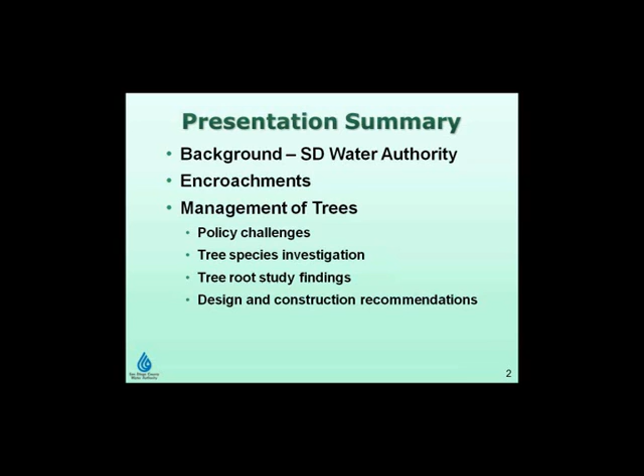As Bill introduced, the topic for today from the San Diego County Water Authority is managing trees in the right-of-way. Again, I'm Bill Rose, Director of Engineering here at the Water Authority, and Vic Bianes is the Engineering Manager. Today we'll give you a little background on the San Diego County Water Authority, some of the encroachments we've dealt with, and specifically about trees, including policy challenges, some tree species we've done investigations on, a tree root study, specifically of our large diameter pipelines, and then some design and construction recommendations we've employed with our facilities.

For those of you not familiar with where San Diego is located, we are in the state of California on the west coast of the United States, actually not all that far from the Mexican border.

Therefore, we import water from other places within California, up towards San Francisco and over towards the Colorado River on the eastern edge of the state of California. San Diego's water travels as much as 500 miles, or 800 kilometers, to serve our customers.

The Water Authority was created in 1944 to import water to our region. We are a wholesale agency. We do not have regular retail customers, but we do have 24 member agencies who then in turn provide retail water service to the 3.1 million people who live in San Diego County.

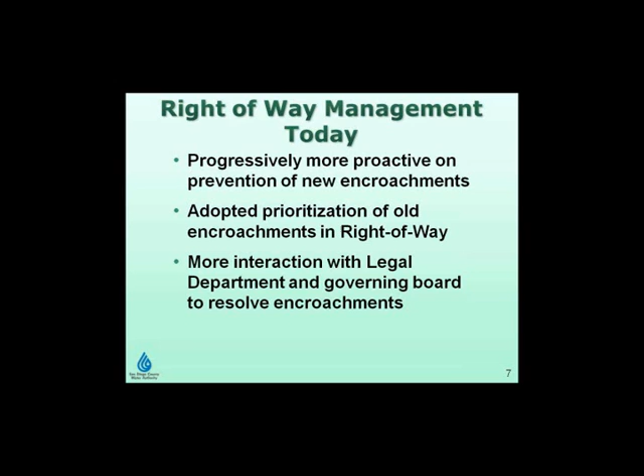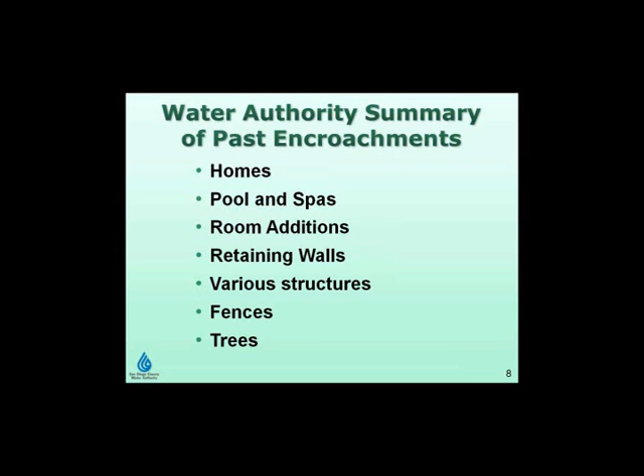Some of those encroachments that we have dealt with include homes being constructed within our right-of-way, swimming pools and spas, room additions to nearby homes, significant retaining walls, a variety of other structures, fences, and our topic today, trees.

Our region has so little water, so when people plant trees, they definitely find a benefit of them. They increase property values. They also have a positive effect on home heating and cooling costs. They improve water quality of our streams and ocean by reducing runoff and erosion.

We're at a transitional zone from a wildlife standpoint. We have a considerable variety of birds and other animals here in our county, and the trees provide shelter and food for them. Also the benefits of absorbing carbon dioxide and producing oxygen. And to be honest with you, trees are just nice looking.

From a policy standpoint, the Water Authority wants to be a good neighbor with its community, and we want to balance the demands of our mission to provide a safe and reliable water supply with those of the adjoining property owners who value trees. So as you can imagine, there's considerable social and political pressure to retain trees.

However, we also need to take a look at the risk and liability to the Water Authority of trees within our right-of-way that may topple and damage adjoining properties. So all of these are factors in us looking at policy-related issues when it comes to the management of trees.

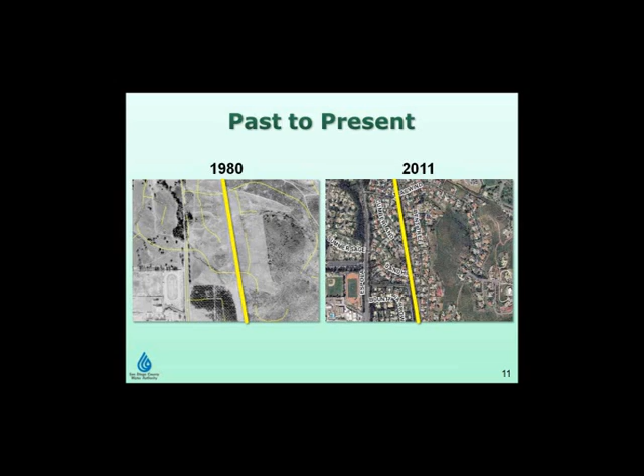Good day, everybody. Vic Bianes here. Trees have always been a concern to the Water Authority, specifically trees in our right-of-way corridor, whether it's how we deal with trees on the operation and maintenance perspective, or during an emergency, how best to remove trees to get to our facilities. In addition, we've always wondered the impact tree roots have on our adjacent facilities.

I know a lot of work has been done on the sewer side, the gravity system. As a matter of fact, IKT did some extensive work on the forces of tree roots having on utilities. But not a lot of work was done associated with tree roots and large transmission mains. So we embarked on doing our own study.

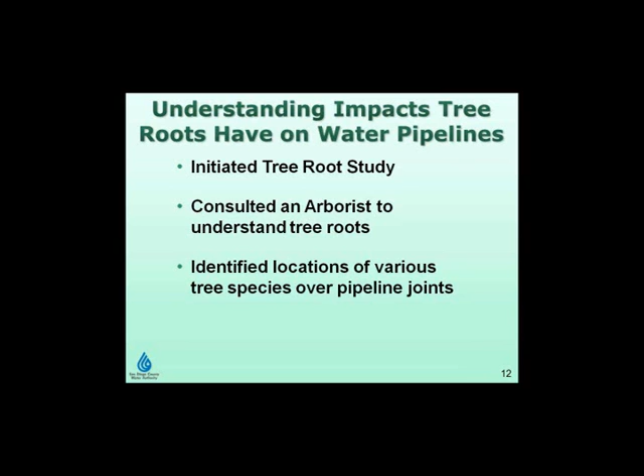We hired an arborist who is an expert with trees. The arborist helped us develop a strategy and planning guideline for us to work from. The arborist shared with us that they expected to see the tree roots somewhere between 3 and 5 feet, and recommended that we look at trees in low topographic areas where potentially water was more abundant, and therefore a good opportunity to study the trees.

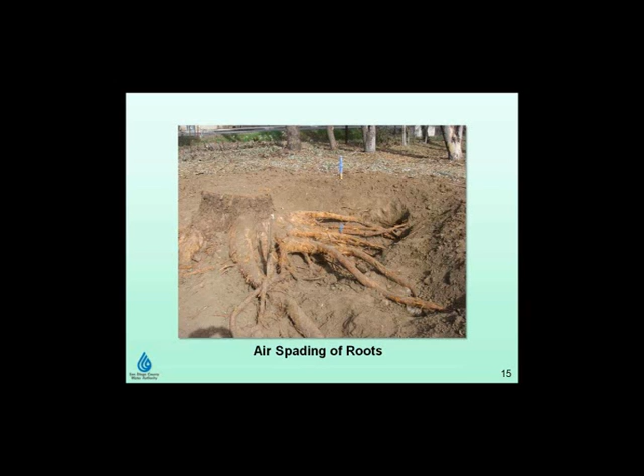Here is that same 125-foot tree cut down to the base trunk. We then used air spading to basically take off the topsoil to get a better understanding of the density of the root system and where the roots were traversing. In the center of the photo, you can see blue stakes, which is actually the center line of our pipeline. This gave us a very good idea of what the roots were doing, at least at the surface area.

We also used conventional methods, and many of you are very familiar with this. We have a track hoe here where we're excavating around the pipe. This actually was not a very good method because it ended up taking the root system with it. This is a very good example of seeing the roots in the center and not being able to follow what happens as it works its way down our pipeline.

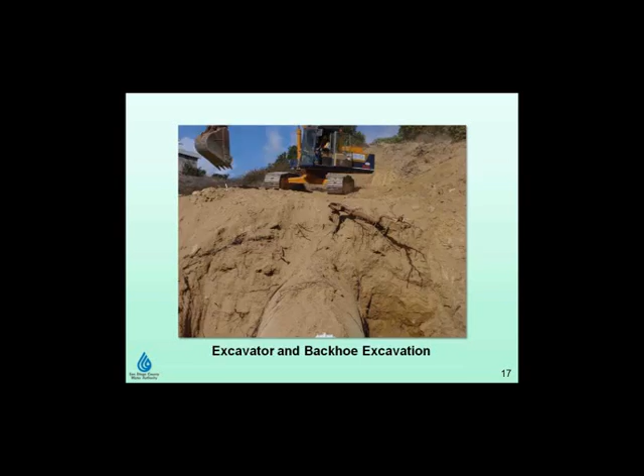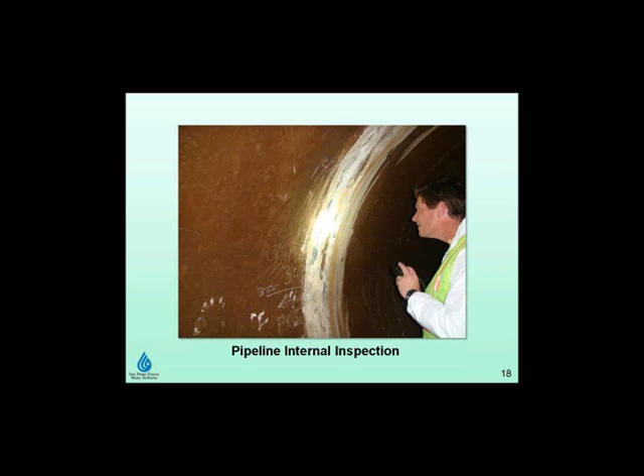All of our pipelines are inspected internally every 3 to 5 years by our O&M staff. The pipes are shut down and drained, allowing us to get into them to inspect the coatings and look specifically at the joint areas. This is a joint area on a 72-inch diameter pipeline, 183 centimeters diameter. In the inspection, we're detecting any issues with our pipeline, and to date, we have never found a tree root that has penetrated through our joint and into our system.

Not only did we look at eucalyptus trees, but we also looked at trees that predominantly fall within our right-of-way. We looked at pine trees that have a deeper root system, and we also looked at the laurel sumac bush, a native plant that grows in our environmentally sensitive areas. We also looked at the pepper tree and citrus trees. In all, we cut down approximately 200 trees to investigate what impact the root system would have on our pipelines.

So what were our findings when we completed this study? The study actually cost us about $25,000, and what we determined is our pipelines have a minimum depth of 5 to 7 feet. The disturbed soil in our pipe trench did act similar to what's referred to as a French drain - no affiliation to the country of France, it was actually Henry French who developed this system. It's a perforated pipe surrounded by gravel, which allows us to drain the surface and subsurface area of water. So our trench actually acted like a French drain.

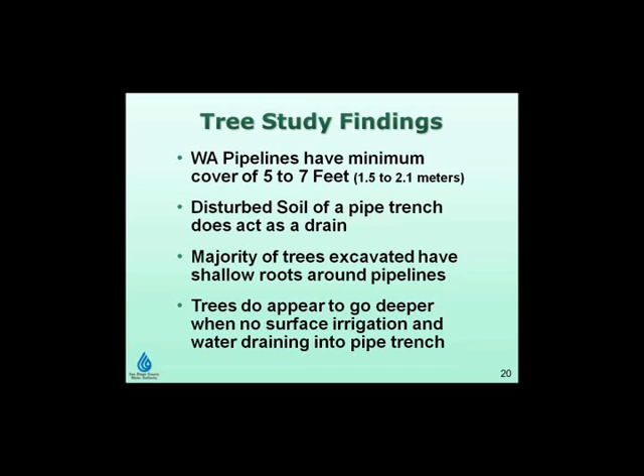The majority of our trees excavated had very shallow roots around the pipeline, but where there was no irrigation lines, the roots went much deeper. What we also found is any of our pipelines under pressure, we did not see any tree roots penetrating into the joints. So we did not see any leakage or damage as a result of the roots.

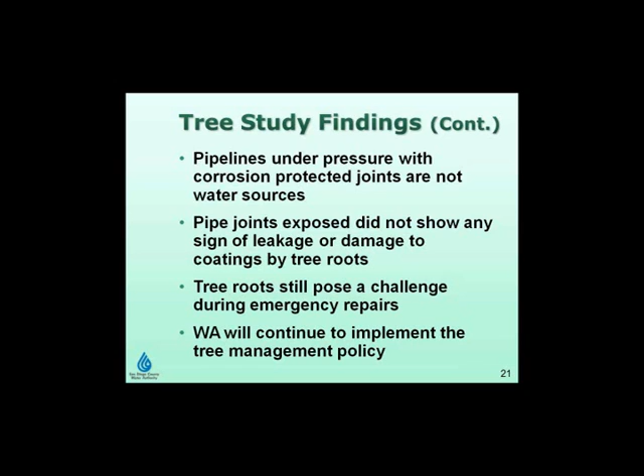Our tree roots still pose a challenge during emergency repairs. As I mentioned earlier, the 125-foot tree, we needed to cut it down to get access to the base, and that took us about a day and a half. We tried to restore services to our customers within 10 days to ensure we could still provide water to the communities we serve. We will continue to look at implementing the tree management policy, which Bill will now get into a little bit further.

Thank you, Vic. So as we moved forward with this process and implementing, the first thing we needed to do was to do an inventory of our pipelines and determine their condition. This is an important factor since some of these pipelines are well in excess of 60 years old. That condition, then looking at how the trees would interact with the pipelines, created a rank and prioritization of which trees would need to be removed. Then we implemented a policy to go and remove those trees and budget money accordingly.

Some of our design and construction practices, which will further reduce the potential impact of tree roots on our facilities - we install slurry plugs, a weak concrete slurry mix at expansion joints to reduce the migration of water in the pipeline zone. We also install filter fabric in the pipe zone to stop the migration of fine soil particles into the gravel backfill of our pipelines. This removes a source of nutrients for the tree roots, and we hope that they then don't follow in and around our pipelines.

We do install those subsoil drains, those French drains, to daylight at low points near where we drain our pipelines at blow-offs and pump wells to remove excess water from the pipe zone. And lastly, we do occasionally backfill our pipelines with that same slurry cement mix to further prevent root intrusion into the pipeline zone.

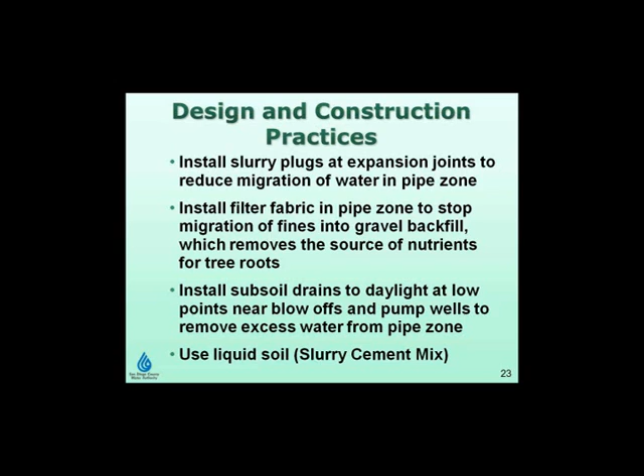So with that, that concludes our presentation, and we would be happy to answer any questions from the participants.

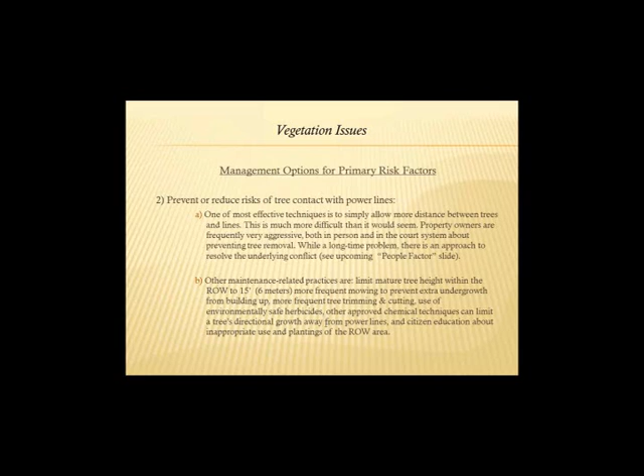The second and most commonly used option is just to prevent the risk of contact between trees and power lines. That sounds very basic, very common sense, but it's very difficult to achieve. One of the most effective techniques is to simply allow more distance between the trees and the lines, and again, that is more difficult than it would seem.

Property owners are very frequently aggressive, both in person and in the legal systems, about preventing tree removal and trimming. This is a long-standing challenge for power companies, but there is an approach that may help resolve that, and I'll address that in a slide later on.

Another maintenance-related practice: for our company, we allow people to plant trees in the strips where the utilities are, as long as we have access and the tree's mature height is less than 15 feet, which keeps them from growing up near the power lines. A lot of people don't realize that electricity does arc - trees don't have to actually touch the lines, they don't have to get within a contact situation. The electricity will arc over to a tree if it gets close enough, and it will arc over to a person if they get close enough, kind of like static electricity when you touch a doorknob. Same concept.

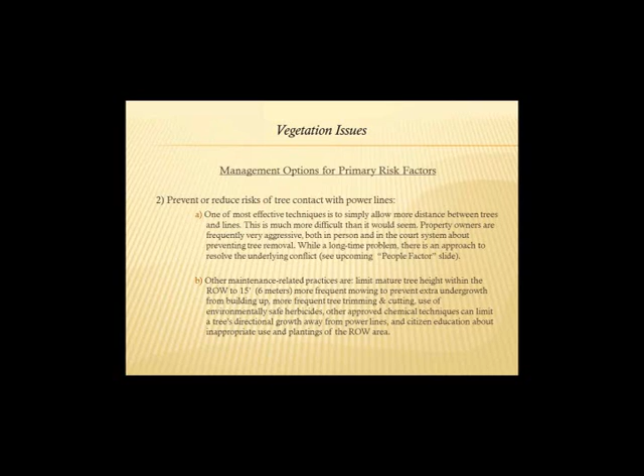Lastly, citizen education about the proper and improper use of plantings within the right-of-way is a topic that holds great potential for improvement.

The upkeep of right-of-way can be done in a lot of different ways and to different standards. This photo on the left shows a power line going through a golf course area, where the company planted some extra landscaping and grass, but the landowner actually maintains all of it.

This is much more than Duke could ever do. With 250,000 miles of right-of-way, we could never maintain this kind of situation.

More likely through rural areas, shown on the right, is a much more environmentally desirable method. It doesn't look as pretty, but we cut material and push it over the side and let it biodegrade, which is a friendlier approach from an environmental standpoint.

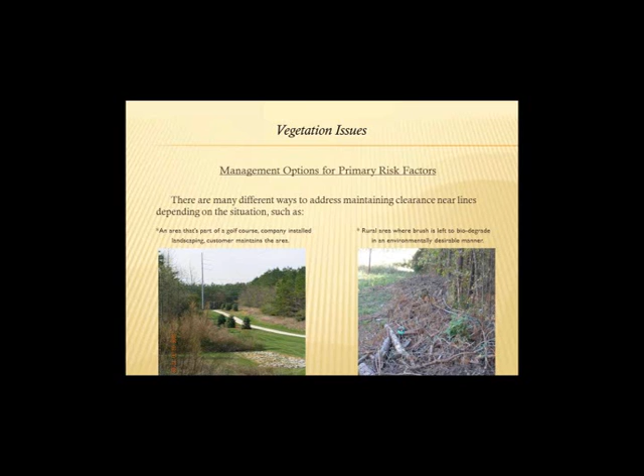What I call the people factor is the source of a large percentage of vegetation management problems for us, because there are groups and individuals strictly opposed to any tree cutting. Most people, though, are amenable or agreeable to talking about these things.

I will say that citizens are frequently presumed to be adversaries. When tree trimming crews go out, sometimes they feel like everybody is automatically going to be against them, and that's not necessarily the case. It does sometimes happen, but it's not always the case.

Politicians are sometimes used by advocacy groups and others to achieve their goals, which is to stop the cutting of trees or the building of power lines for people who believe we shouldn't have any more. These politicized projects result in increased cost, bad publicity, delayed schedules, or canceled projects. It's different in every situation, but these issues are almost always involved when you have legal actions and advocacy groups that stand up to stop a project.

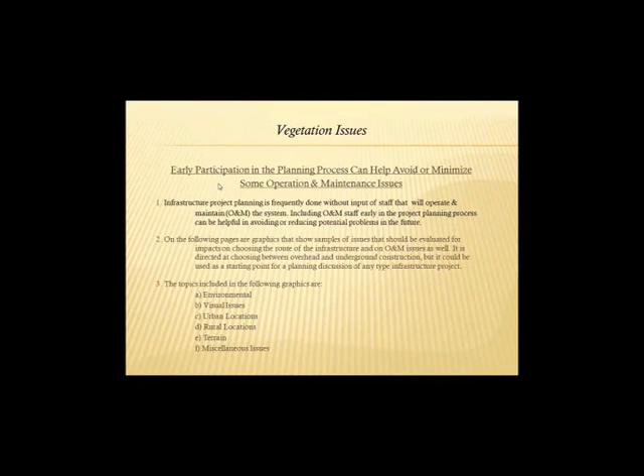Early participation is the last section. If people who do the operation and maintenance of infrastructure projects get involved early enough in the planning process, they can help avoid or minimize some of these operation and maintenance issues related to vegetation.

Infrastructure planning is frequently done in some companies without input from staff who will actually be operating and taking care of vegetation issues later on. If they're able to get into the process early enough, they can help avoid or reduce potential problems in the future.

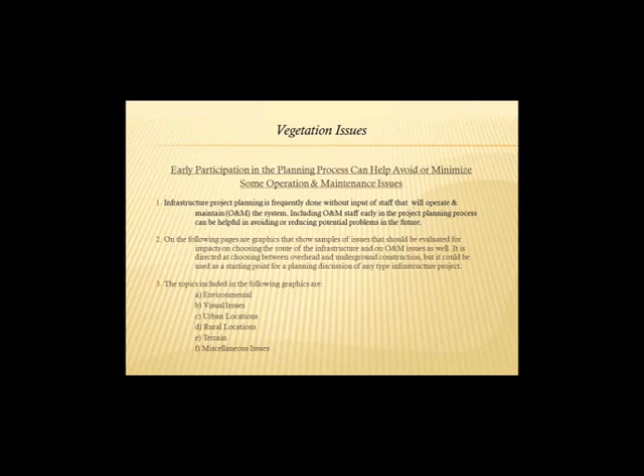On the following pages, I've put together several charts or graphics showing samples of issues that could be evaluated. We won't go through all the different items, since each project involves different challenges, but these are examples of the kinds of issues that need to be looked at. I'll go through these very quickly.

Project designs are greatly affected by wetlands. In my part of the world we have wetlands, mountains, and coastal plains, so a wide variety of terrains, but wetlands are a big challenge. They obviously affect vegetation management issues forever, since once the project's put in, that's going to have a big impact.

What we call brownfields are environmentally contaminated land, old industrial sites. Obviously that affects vegetation issues for as long as you're there, until cleanup and that sort of thing is done.

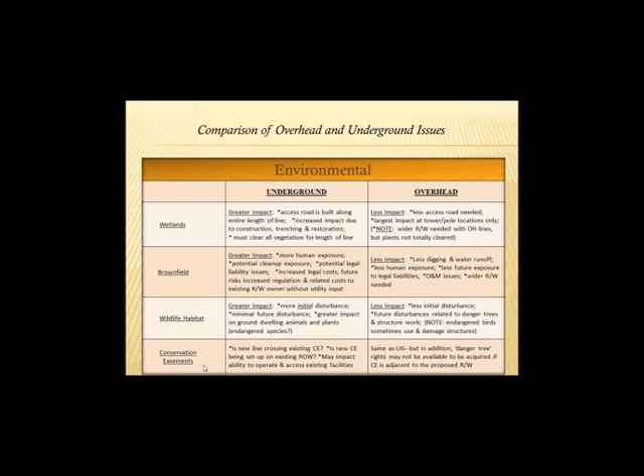Wildlife habitat is another issue that's affected. Conservation easements are tracts of land legally restricted from development, and they're obviously a challenge in some cases. You also see the difference between public lands and private lands as far as what you can and can't do regarding plantings and trimmings.

Historical sites, archaeological issues—obviously if you're going to be digging, if you're going to be spanning, the visual impact is certainly greater with historical areas.

Urban locations, you look at smaller footprints, you look at plantings that are allowed in the city and outside for rural areas.

In congested areas and urban locations, you have congestion with other utilities that I'm sure everybody on this call is familiar with, but that's one of the considerations that maybe the planners wouldn't necessarily give much weight to. But if you operate the system, it would obviously be a challenge for you from that point on.

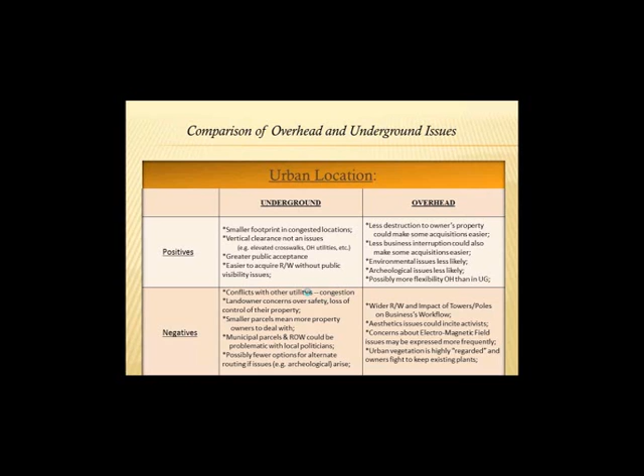There's also different challenges in rural areas—you have challenges for terrain. These issues are obviously going to have a big impact.

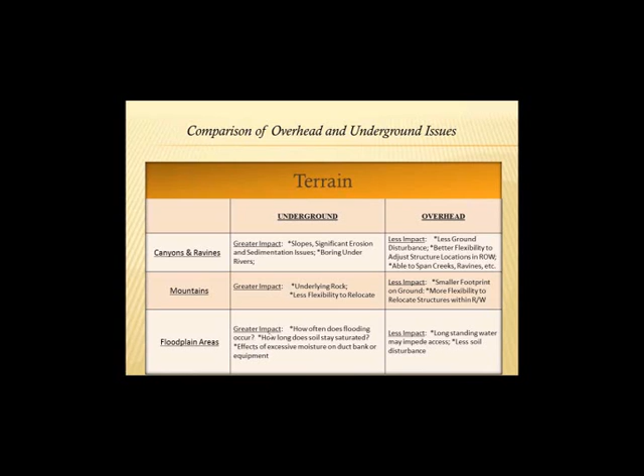Again, there's more challenges, particularly future land development. If you're going to be providing infrastructure, you need to know where your development is. You need to plan for it. You need to not be relocating your utilities because somebody didn't think about what it's going to take to operate and maintain the system.

Final slide is just some things to think about: ask if your department participates in the planning process, and would it be helpful to identify problems before budgets and schedules are established. These things are a big issue in my company, where sometimes teams of people get together and maybe the people who are going to operate the system didn't get invited or didn't get there early enough in the process.

So that's the end of my presentation. Are there any questions? I've put my name, my email, my phone number up if anybody would like to consult and ask questions in the future. Be glad to do that.

Okay, thank you very much. But I still have one question for Glenn. And Glenn, you have shown us a

comparison between underground power cables and overhead power cables. In Germany, there's a lot of discussion about electromagnetic waves and that they are a danger to people in residential areas, and that for this reason one should try to build all those new cables we need now underground. Is that an issue in the U.S.?

Nice to see you, nice to hear you. I'm not very technical, but I'd like to show you something about law and planning. In the past, I was in charge of planning grids for electricity, IT, and gas, and now I've changed the business a bit, still dealing with cables and pipes.

Coming to the first slide, just to show you where we are in Germany. Thanks to NASA, where I've taken this photo from, you see the world at night, energy hotspots. The yellow arrow shows where we are, in the middle of Germany, more or less in the middle of Europe, and you see a lot of illuminated countries.

What you can see, which is also very important for planning grids, is that we partly have an east-west direction, but very often we have a north-south direction for the hotspots. If you're dealing with shifting energy, many people say let's shift it from east to west, but unfortunately we have to shift it from north to south.

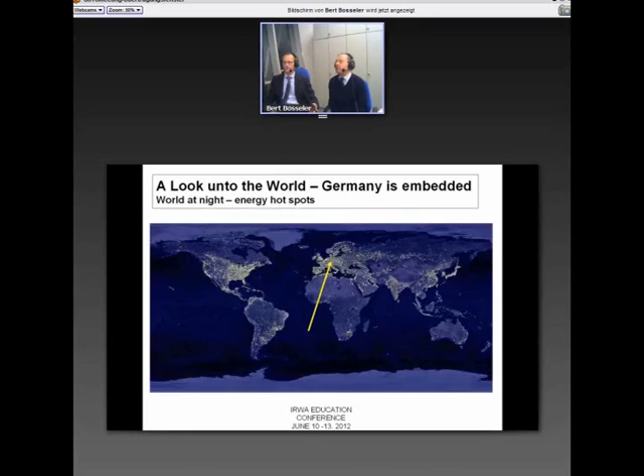So if we want to take solar power, for example, by the rotation of the Earth, it doesn't help very often. You can also see where energy is needed.

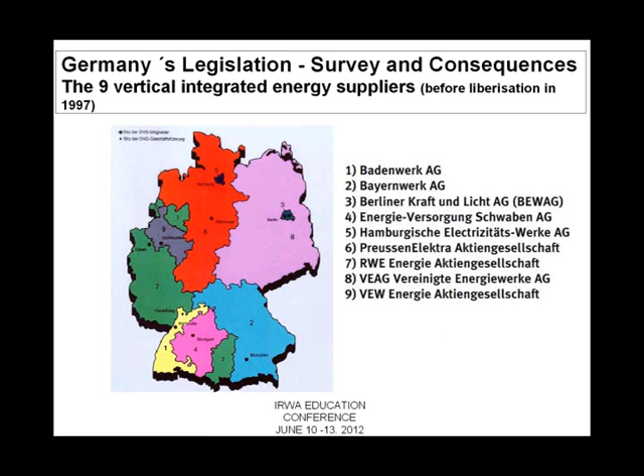So that was the situation before liberalisation, and then we changed to liberalisation. What happened? Now there are only 4 grid operators left.

So everybody thought about saving energy, and what did they do? They reduced the number of power stations. Many power stations were switched off, and last year they said even the nuclear power stations will be switched off within the next 10 years.

The second step, as you can see, was the reduction of grid owners. They also wanted to save money, saying we'll optimize our grids. Optimization very often means reducing what we don't need, and sometimes they build some bigger cables to prevent blackouts, but that's a point where we're stopping at the moment.

So what had to be built, or what happened to the grids? The commercial view says you can't earn money with the grids, so the grids were sold, and now they are almost not in German hands. For me, the grid is the backbone of the industry. They were sold to foreign companies looking at world markets, asking where they could get very high interest rates, and the interest rates for grids are much higher at the moment than for money in a bank.

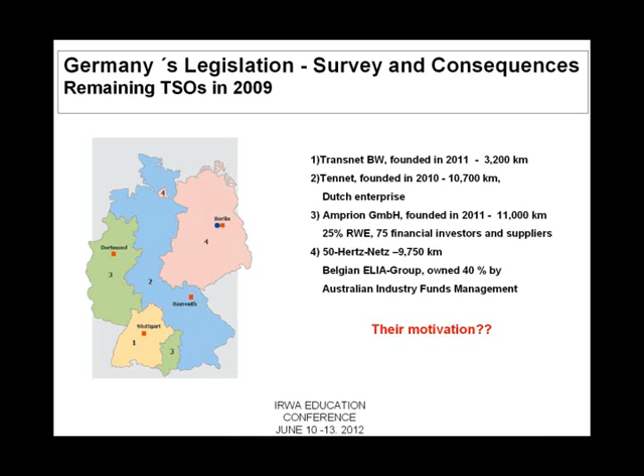The former E.ON grid is sold to a Dutch enterprise. Amprion, in the past owned 100% by RWE, now just 25% RWE, is a company which also tries to keep the frequency constant. And there's another grid sold to Belgian and Australian funds. They don't have the biggest interest to invest money, and if they want to invest, they have some other problems.

So what we have to do when we want to switch off the power stations, we need new grids. In the past, we had the production of electricity where the power is needed. Let's compare it to a human body: the head is quite close to the heart, and you have very good vessels in between for the main supply. That was the past in Germany.

What they are doing now is building offshore parks in the North Sea. So they are putting the heart into your feet, into little tubes, and the heart in the little tube has to supply your head. I don't know whether it can work, but there are a lot of dangers that it fails.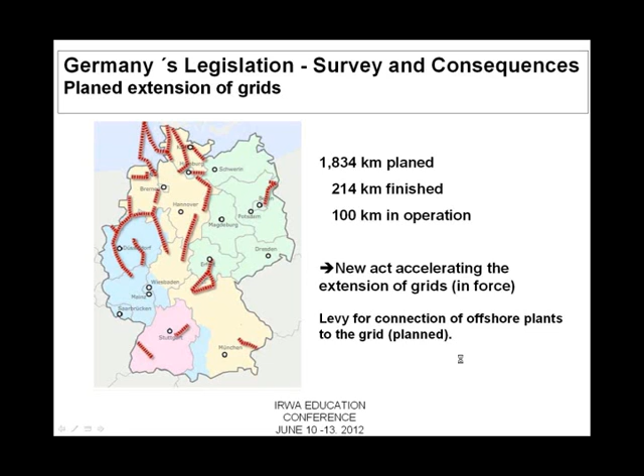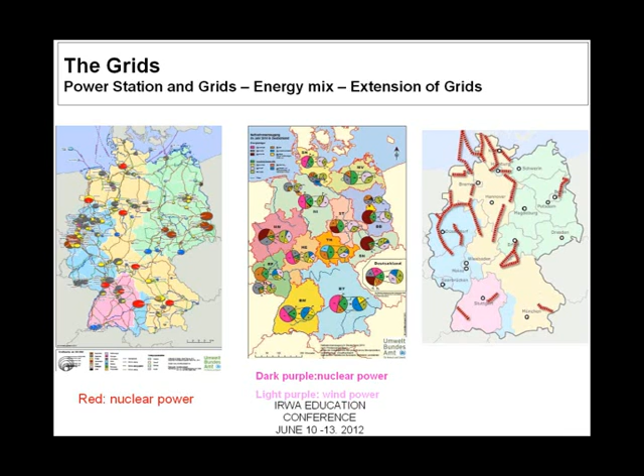How does the grid work? At the moment I'm in charge, I was in charge for the distribution. You see the medium voltage and the low voltage. The high voltage, at the top of the slide, has to be built.

Electricity has, compared to gas, one very good thing: you can transform it to high voltage and low voltage. But everybody forgets that electricity is an artificial kind of energy. We have to keep the frequency constant, and we have to keep the voltage constant.

When you have quite a lot of renewables in your grid, and you don't run the big power stations, the frequency can move up. What can happen is the renewable power stations, like wind turbines or photovoltaics, are switched off. That's not the problem. But what happens if you've switched off the big power stations like coal or lignite power stations? The frequency decreases, and then the grid is switched off.

So what we are coming close to is blackouts, because we can't keep the frequency. That's the situation we have in Germany, and we are still waiting for the top part, the grid for transportation, the high and highest voltage, to be increased and built. At the moment we are more or less a bit disconnected.

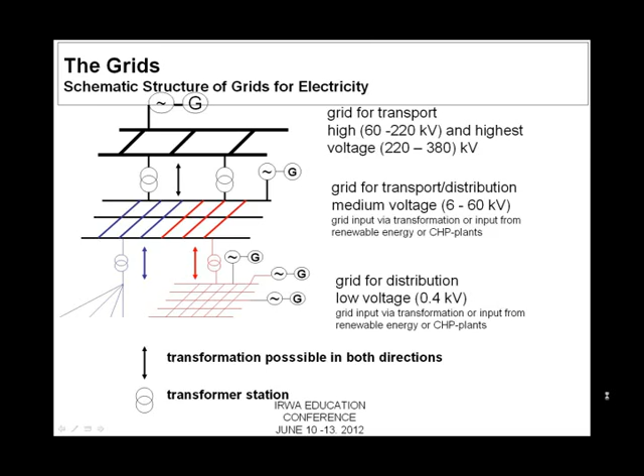So I think for me it's a very dangerous thing, because the backbone, the grid, is missing. We would be happy to be able to build grids and talk about routes which can have interference with the grids. You can see as long lines what I tried to explain, for 2022 and for 2032. We have to build grids through Germany.

Unfortunately, the same is happening here. It was planned to build them as overhead cables, but unfortunately the discussion in Germany is very hard, and they don't like the magnetic fields. Everybody wants to have the cables in the ground.

The estimation was 57 billion euros with overhead transmission. At the moment it has increased to more than 80, I think, because everything has to be put into the ground. And what we don't have is the space — we don't have the space for putting the cables into the ground, because we have a very high population density, 85 million people in Germany.

And it has an advantage to have the grid in the ground. Think about floodings - the masts can't be washed away. We have, because of global warming, very heavy local storms. We have trees on the cables, and we have quite a lot of interference with them.

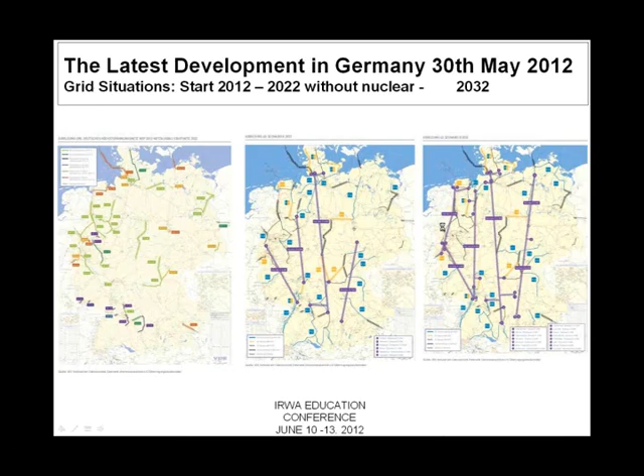And in between, us a slide of how it was done in the past with the ditches, where money remains. It's very expensive to put cables or pipes into the ground. And there is also a newer slide, because we changed our standard.

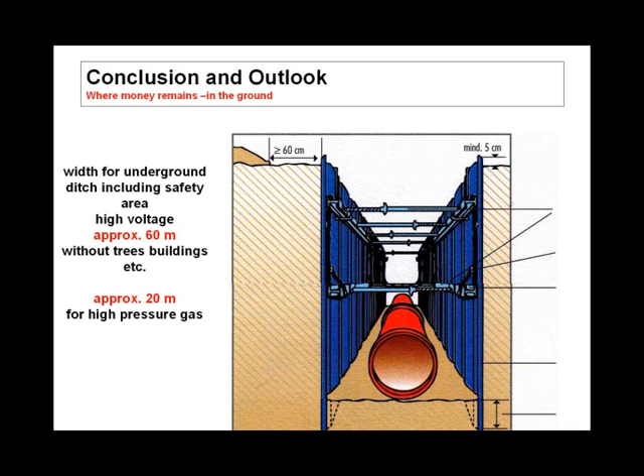So we would be quite happy to build the high voltage grids. At the moment, it seems to be stopped. But with the new minister, they call him Super Minister, Gabriel, well, he's starting today. We'll see and wait what will happen to our grids and also to our electrical supply, because I think everybody needs electricity. And if you think about a blackout - I don't like to think about it because it's my task - no food, no light, no money, nothing works without electricity. So we have to make sure that our grids are working and that we have good grids.

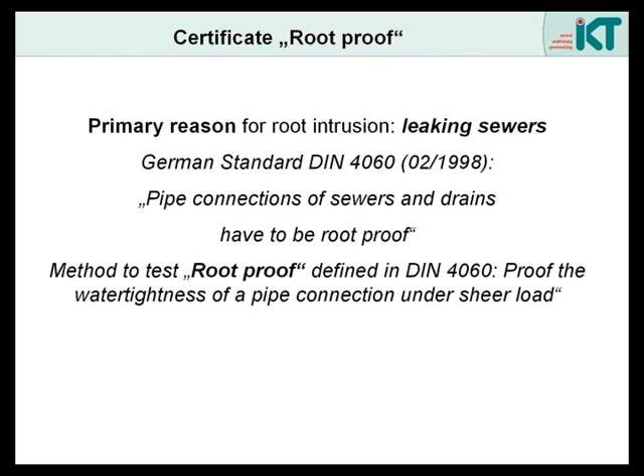As you know, we started with a very small problem in Germany. It was simply that we have some roots in the sewer systems, and we have to find solutions for that. Therefore, we started a project in 1998. In the same year, we had a German standard, DIN 4060, which described what are root-proof pipe connections. It states that pipe connections of sewers and drains have to be root-proof, and the method to test root-proofness defined in DIN 4060 is to prove the watertightness of a pipe connection under shear load. But we very fast found out that this was a logical argumentation for engineers, but trees don't read German standards.

So I will now show you some pictures of roots and what they are doing in the ground in the city - not actually the big transmission pipelines, but I have some pictures of what roots can do to oil pipelines, for example. We started with a small problem. We started to look at the bedding material where the roots grow very vividly, and Bert pointed out that the pore volume is the reason why they grow there, and that we have no problems with water, with the lack of water in the ground.

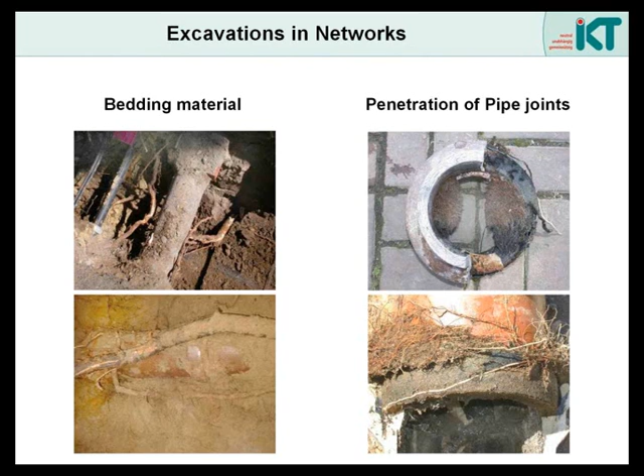And therefore they find trenches, and therefore they find the pipes and the pipe connections. So we have several cases of root intrusion in pipe connections. It's one of the biggest problems in sewer systems. This is a detail of one of these pipe connections with an elastomeric ring, and you see that this

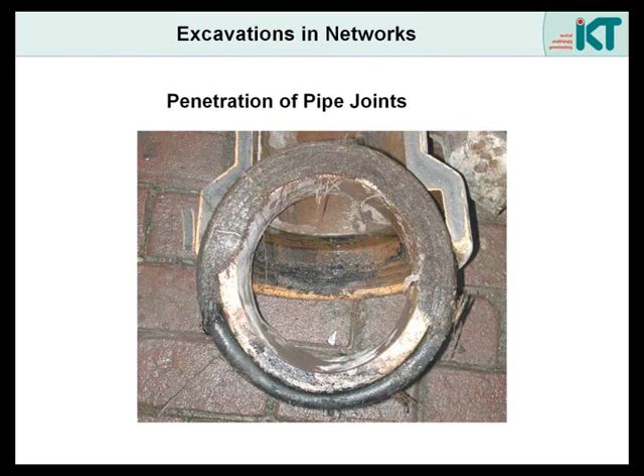is a modern pipe connection, and roots are able to enter the sewer pipes through these connections. We asked, can they really do that? And we found it, for example, at a depth of 7 meters. So we have not only shallow roots.

We found out that the trenches of the private sewers we see here, these orange sewers, guide the roots into the deep. The private sewer, which is responsible for the sewage that comes from the private house to the main sewer, is the one responsible for the aerification of this zone.

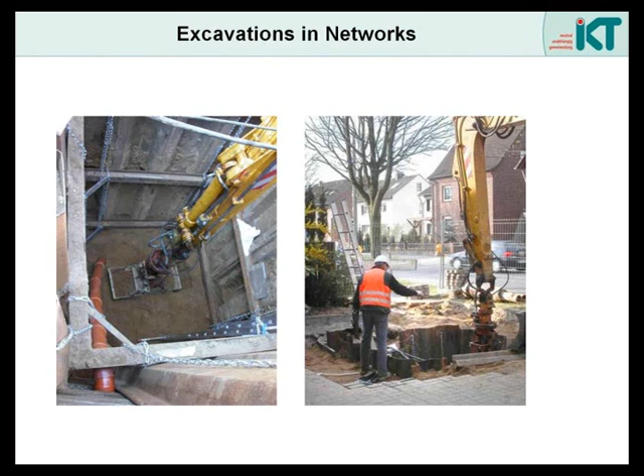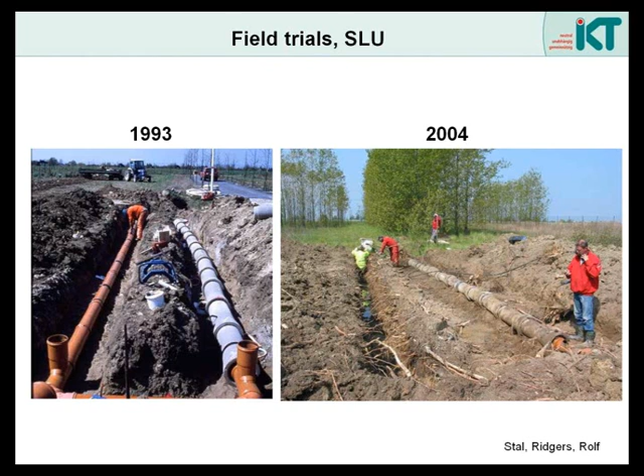Going international, we have some partners, for example in Sweden, who built some trials in 1993 and dug them out in 2004, and they found that especially other materials like PVC and concrete pipes also have an impact from root intrusion, though PVC especially doesn't seem to have the problem.

For example, the Australian CSIRO made some tests with PVC pipes and found that after 32 months of testing, no PVC pipes were penetrated by tree roots, but the other vitrified clay pipes and FRC, fiber reinforced concrete pipes, had penetrations after 32 months.

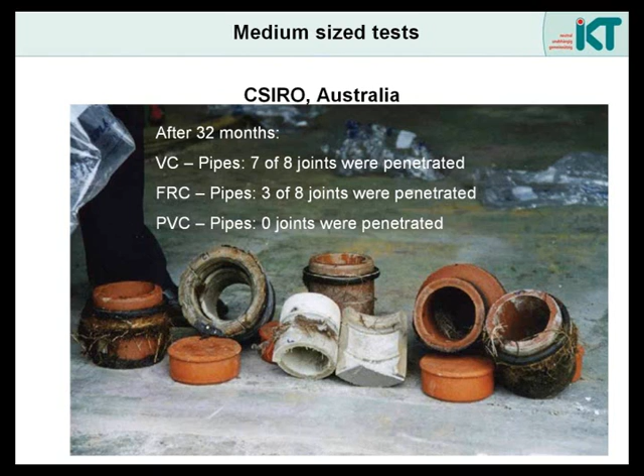So we are convinced that most of the pipe connections for sewer systems have a problem when they consist of a spigot end and a gasket. Therefore, we made these tests to measure the root pressure.

We had a kind of small testing facility at IKT where we used plaster plates, put in, for example, oak trees, and let these roots grow underneath the plaster plates, with pressure-sensitive layers put out underneath, and then we measured the contact pressure between the plaster plate and our pressure-sensitive film.

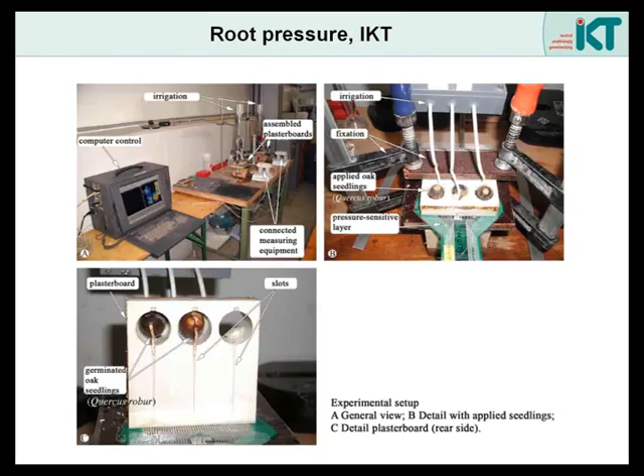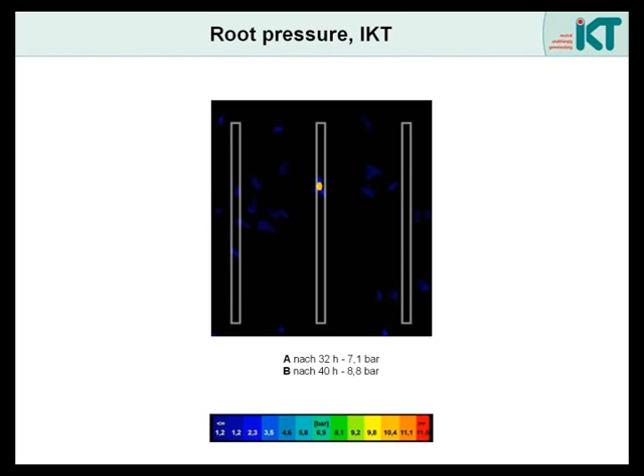These are the slides that show the roots growing in this area. They have secondary growth, meaning they get bigger, and after approximately 70 hours we have a contact pressure of 11.9 bars, that means 1.19 megapascal.

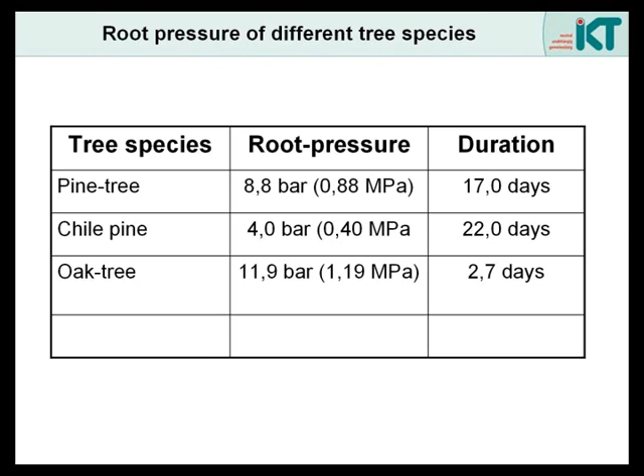We did that for different tree species, for example the pine tree, the Chile pine - in German it's Araucaria - and the oak tree, and measured different root pressures after different durations, coming from the Chile pine at 4 bars up to the oak tree at 11.9 bars. We don't know why there are these differences, but we measured it.

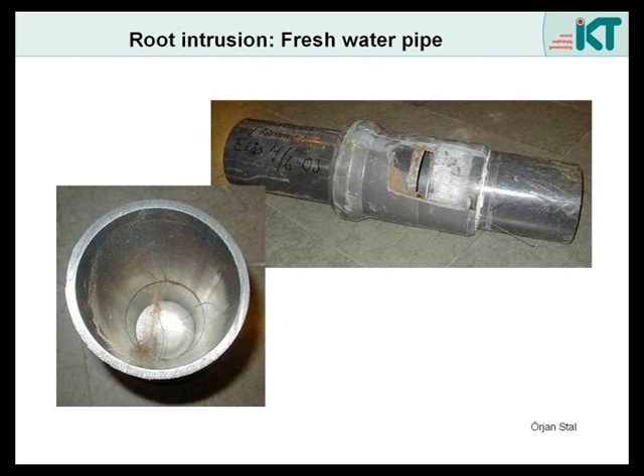during installation. Possibly small roots lived up these glued pipes, found a crack, and grew in. You see here, for example, fine root materials that grow in the annular gap between the spigot and the gasket.

Another possibly bigger problem is the contact to gas pipes. This is a picture from Johann Wittmann from the city of Mönchengladbach, and these contacts to other utilities can cause different damages. In the easiest case, some gas comes out of these pipes, and the network operators can smell it, like in this case, and build a new pipe.

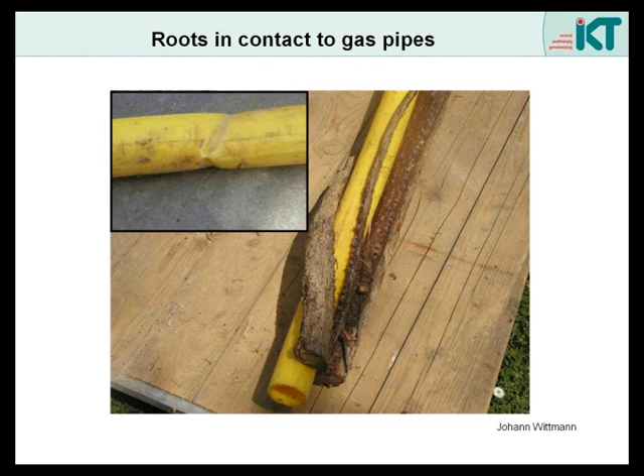But it can also go into private houses and cause an explosion, as it did in the city of Viersen, for example.

Then we have other problems with roots. Roots follow the trenches and the surfaces of pipes, and when you have coatings, for example with this bitumen material, some of these roots like the bitumen and get in contact with it. They have some acid that comes out of the root tips, and this can destroy the coating, and afterwards we have the problem of corrosion in these pipes. This is, for example, a high pressure pipe.

These are pictures from Clemens Heidger of the city of Hanover, showing cases where we have a concentrated load of oak root on steel pipes. This interaction can cause several damages to these pipes when wind load goes into the root and then down to the pipe, and possibly can crack these pipes.

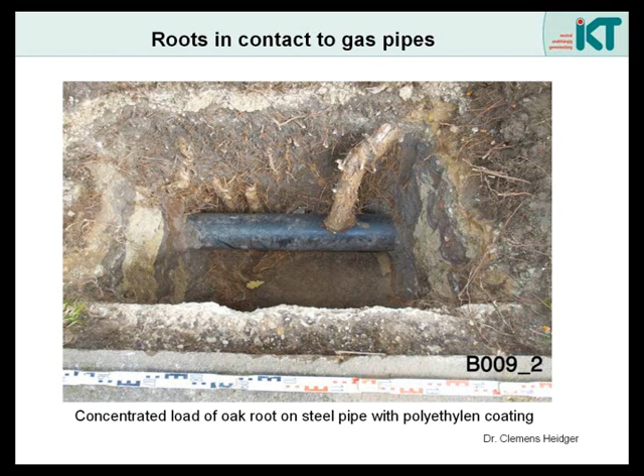In this case, either the root has to be pruned, or the pipe has to be laid in another position.

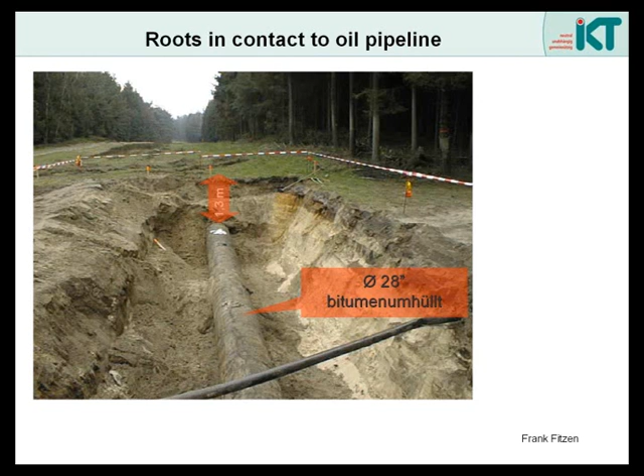And I have a picture from some oil pipelines, from one company that runs an oil pipeline from the city of Rotterdam to the Ruhr area. I got these pictures last year, and you see here the oil pipeline and the corridor that's normally protecting these pipes. But when you look in detail, the roots from these trees grow the way from the point where they are planted to this pipeline and get in contact with it.

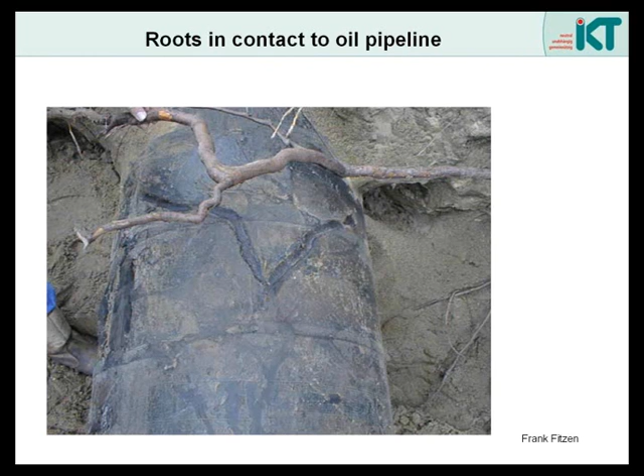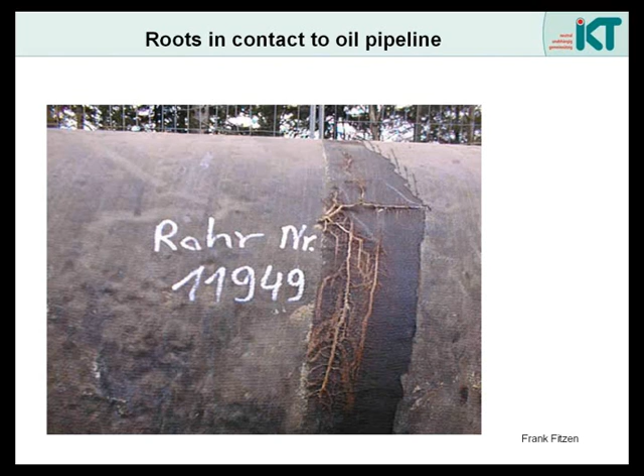This oil pipeline, like the gas pipe we saw pictures of before, has bitumen around the steel pipe, and the coating in this case was intruded by roots. Again, corrosion could be a problem, and when this corrosion is too big, it can cause a big problem when the pipe is leaking and oil is coming out.

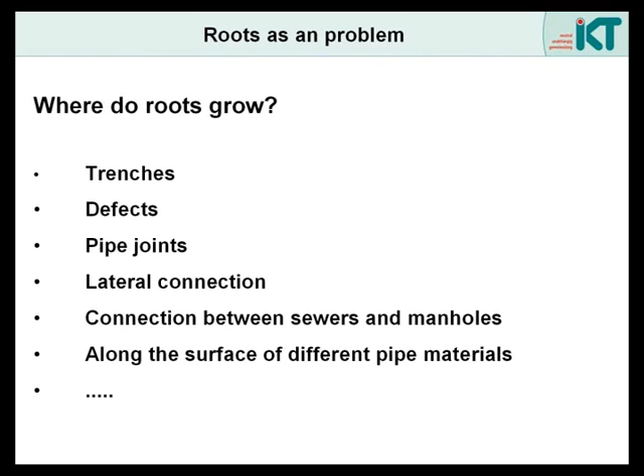So normally, as an engineer, we have to say roots are a problem, because they are growing everywhere - in trenches, defects, pipe joints, lateral connections, and the surface of different pipe materials. Normally we have to say: no trees in the city. That could be one solution to the problem.

But as Bill Rose pointed out, trees are not only causing problems, they have some benefits. For example, when we talk about shadow, we are talking about oxygen, and we can create a win-win situation, as it is described, for example, there.

Therefore I will show you this small example, an old example that we often discussed in our working group. It shows the problem in cities when you have to find new corridors for utilities. Normally you use a pedestrian way for this case, and on the left side you go along the pedestrian way and put in, for example, a gas pipe or a water pipe.

But normally, when there's a tree directly near these pipes, you are not able to build them in, because roots are growing there and there, so you normally have to go into the middle of the street. But Klaus Schröder had this example during his work in the city of Osnabrück, and he said, okay, let's have a look at what happens directly beneath the trees when we dig it up with vacuum excavators.

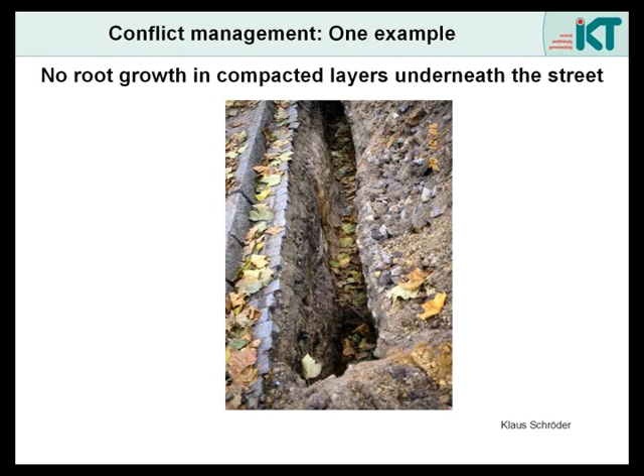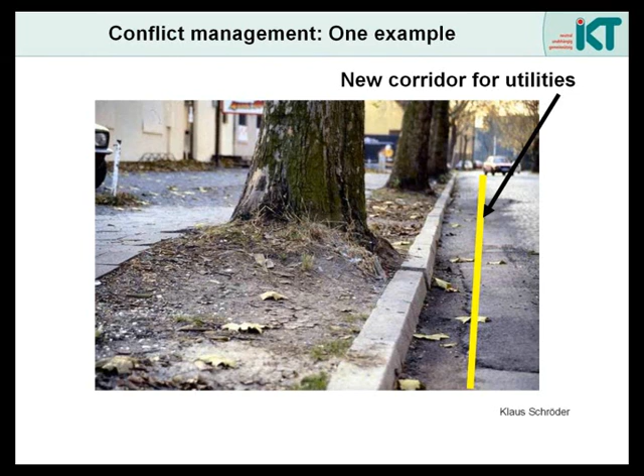Therefore we looked at the other side, and there we found no roots in the street. That was one of the big examples of how we can manage the utilities in the street - that we can find corridors just by looking the first time, and when we didn't find any corridor, we have to talk about that. This is then the new corridor for the utilities.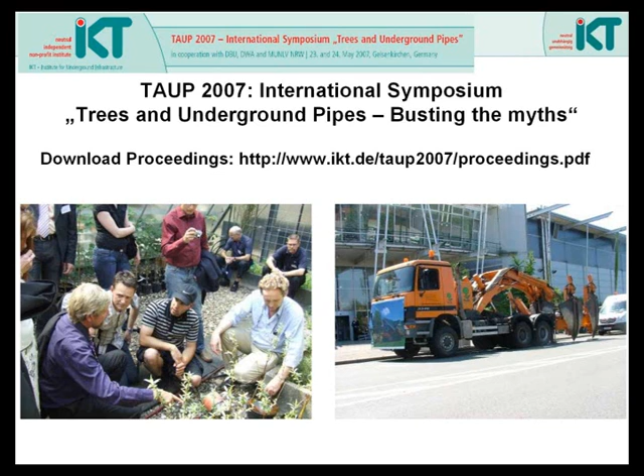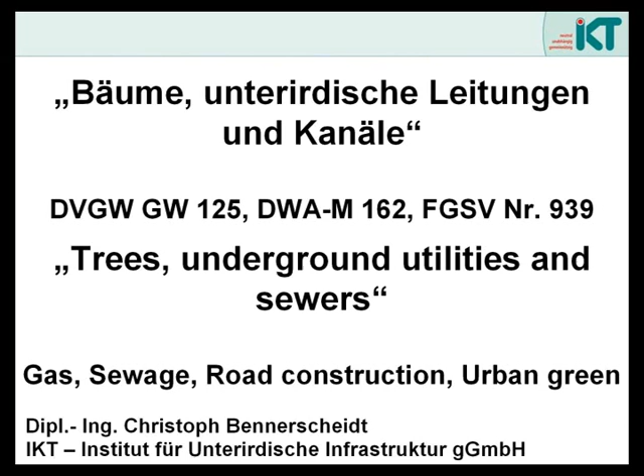In 2007 we had solutions for that, but we hadn't got a basis to talk about the topic with other utilities. I think it was the right time to start the work of our working group, to revise an old standard from 1989, in Germany: Bäume, unterirdische Leitungen und Kanäle - translated into English, Trees, Underground Utilities and Sewers. I think it was a unique thing that we had different participants from gas, sewage, road construction and urban green, trying to find a common language for how to work with this topic.

And it was based on our results from the research projects. So in February 2013, the interdisciplinary leaflet was published, after 7 years of work. Bert Bosseler is the speaker of the group, and Peter Lampret and I are members of this group.

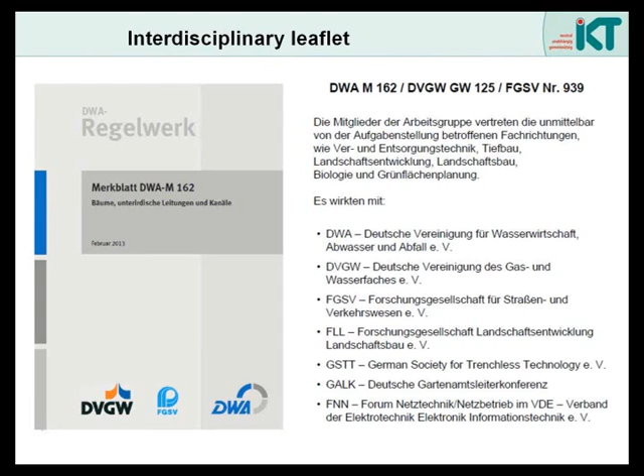You now get it from the German Association for Wastewater and Waste, from the German Association for Gas and Water, from the German Association for Streets, and FLL is for the green part, people who work in Germany planting trees and caring for them. Additionally, we have the German Society for Trenchless Technology, the GALK. These are the heads of the green departments in Germany, and FNN for electricity, and especially Peter Lampret is a member of it.

Now I will show you only 2 points from these leaflets, because we described different protection measures - active and passive - and these are just 2 examples of how we can work together. The objectives of active protection measures are to construct an optimised specific volume for roots, to foster root growth in these specific volumes, and to limit root growth to these specific volumes.

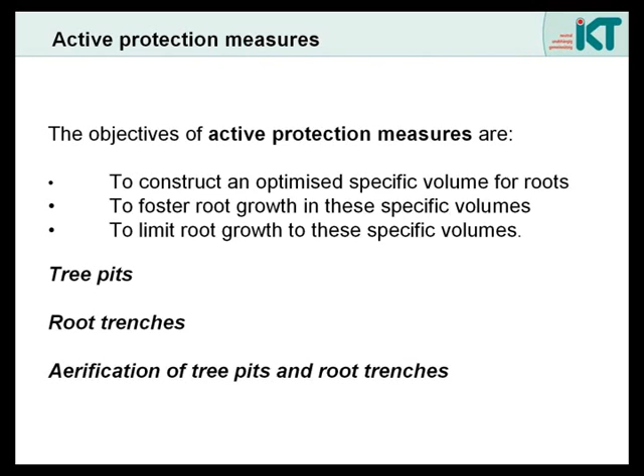The methods for doing this are to create tree pits, to create root trenches, and to aerate these tree pits and root trenches. Some examples of what has been done in the past - this is one example from the city of Osnabrück.

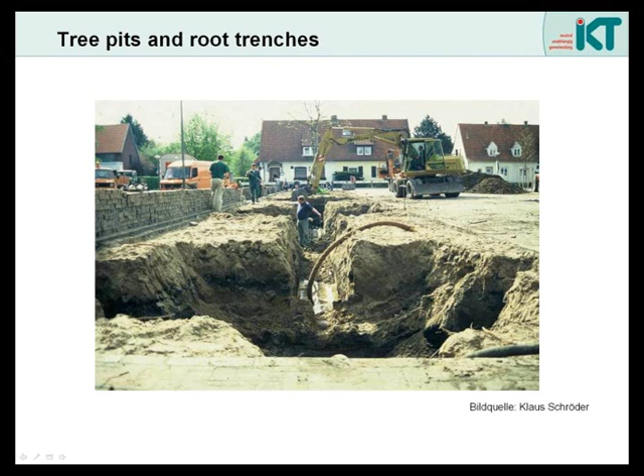This is under a parking area. You have really big possibilities to do the work, and this is a combination of tree pits and root trenches. As you see, if there's someone who has the power to manage the trees, he's really building big tree pits and big root trenches. In this area there will be the place for the trees to be planted, and the connection of the different tree pits - these are the root trenches that connect different tree pits.

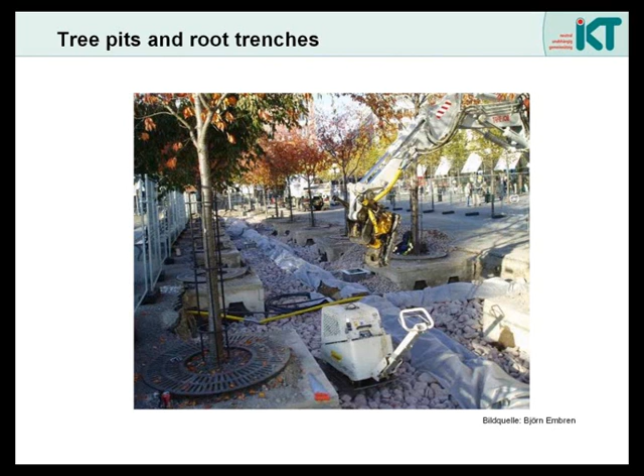When you think in the same dimension for the city of Stockholm, they do it this way. They are building big root trenches between the different trees, and in addition they use the stormwater from the surface to put it into the ground and store it right there. I think this is a possibility to create a win-win situation for stormwater management and for the trees in a crowded area in the city of Stockholm.

On the other hand, we have some passive protection measures. They are in direct vicinity of underground utilities and sewers. The easiest way to implement passive protection measures would be during pipe installation in an open trench. The methods I described in our leaflets are bedding material with a low pore volume.

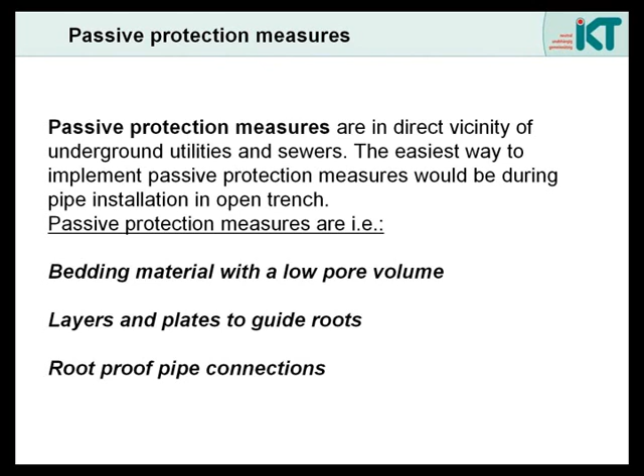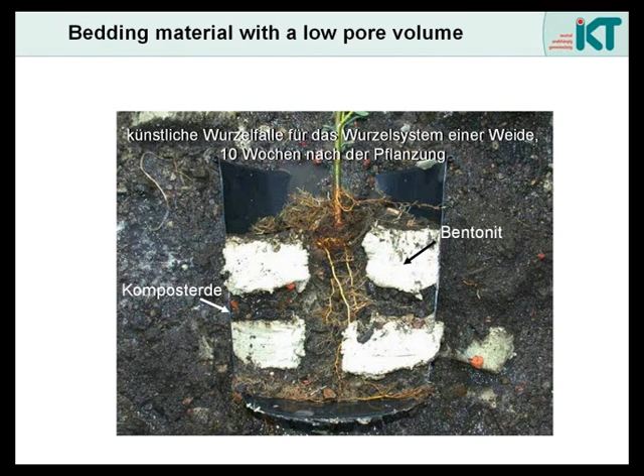This is, for example, what Bill Rose is doing in San Diego when he uses liquid soil. We have layers and plates to guide roots, but we still don't know how they really work. And you can use root-proof pipe connections, for example. The reason why we look at material with a low pore volume is some tests we did on a very small scale. We only used bentonite and garden soil, and looked at how roots of a willow grow there, and found that especially these areas with a very small pore volume in this soft bentonite were not intruded by tree roots, and therefore we wrote it down into our standard.

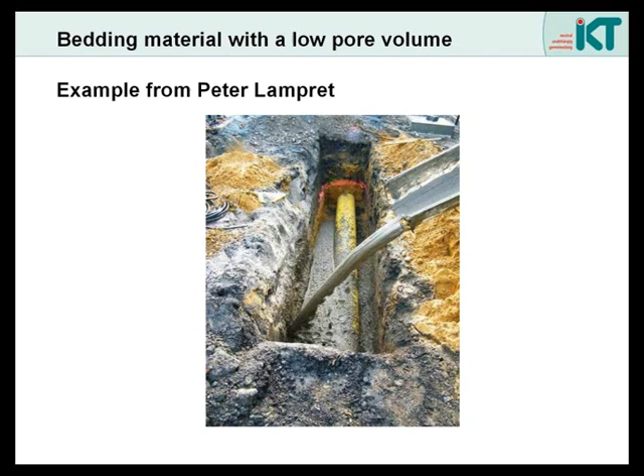Therefore, Peter took this chance and used liquid soil with a low pore volume to protect his gas pipes, where he directly planted some trees on top. So it is possible to find solutions in the crowded areas of cities when you look at some details of how to create the properties of trenches, for example. And I think this is a possibility in the future to get more green into the cities and to lay new pipes.

We started a project to test bedding materials with low pore volume. The idea is simple: we have trees and trenches, and we put in different materials—on the left side substrate, on the right side the bedding material with low pore volume—and then we look at what happens there.

If this bedding material really protects our pipes, because it could change properties, for example by shrinking. Cracks can occur over time, and therefore we made bigger testing stands by planting large trees, as you see here.

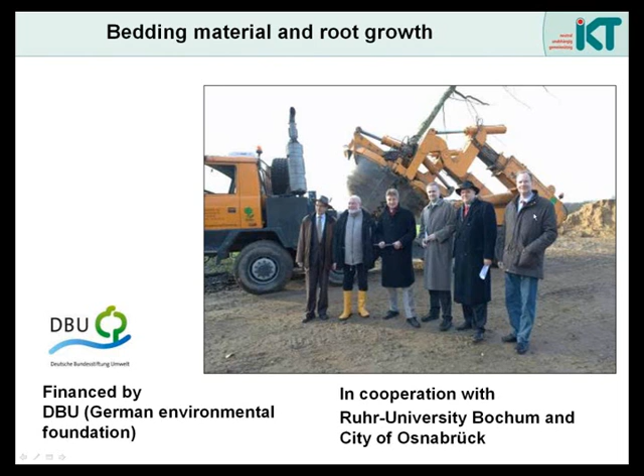These are the people responsible for this project: Professor Stützel from Bochum, Klaus Schröder from Osnabrück, Mr. Brickwede, head of the German Environmental Foundation, the mayor of the city of Osnabrück, our CEO, and Peter Heidenreich, who works for the German Environmental Foundation, which financed our test facility.

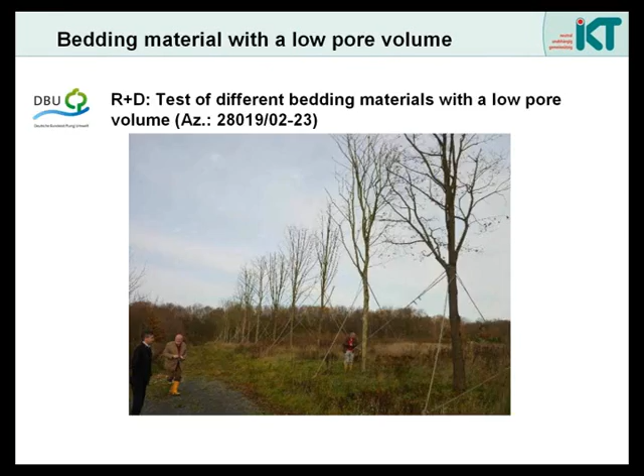And there it is—we planted these trees, and we finished this new planting, and now we can test different materials. These are our partners that supported us during the test.

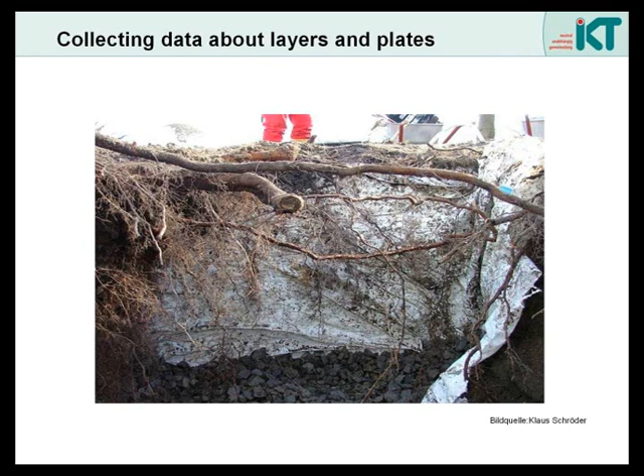We found some pictures showing what happens when trees enter trenches and make connections to different layers and plates. You can see the roots growing along these layers, and it would be a big advantage to get more information about that, because layers and plates are used to protect pipes against root intrusion. Possibly these roots are only guided along the layers and plates and find their way into the trenches again after a longer time.

One idea we discussed is to create a win-win situation in the trench—for example, using bedding material around the pipes, and substrate with a high pore volume on the upper part of the trench, so you have an area for trees and roots, and also a method to protect the pipes.

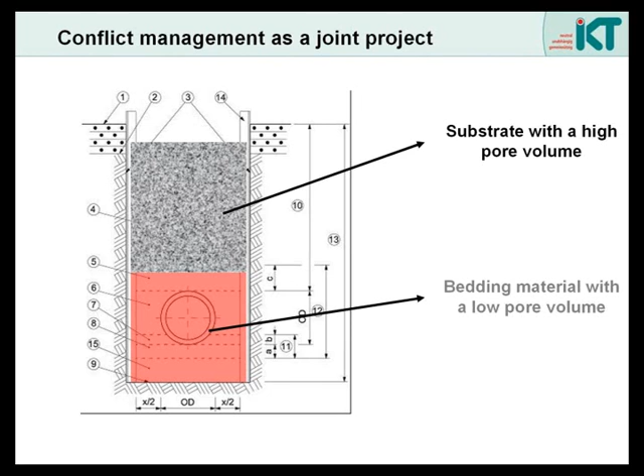Of course, you have to define what happens when there's a problem with a pipe, so that you can work with the substrate. But we are convinced that the number of trees will increase when we find these solutions.

So as a conclusion, the leaflet 'Trees, Underground Utilities and Sewers,' published by these different organizations, describes the interaction between vegetation and underground infrastructure, and it now has a scientific and practical background.

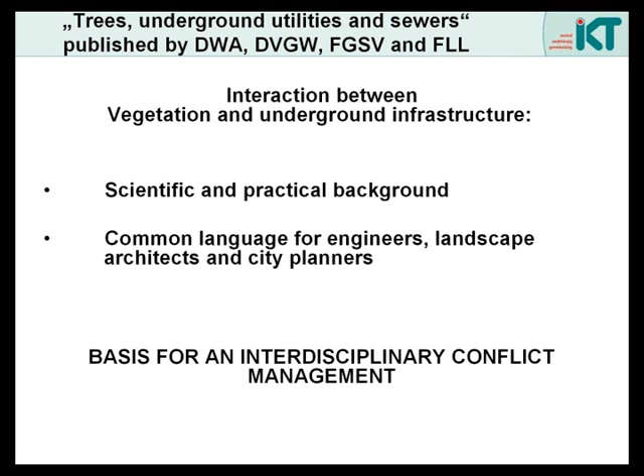The most important thing for me is that we found a common language for engineers, landscape architects, and city planners. This is important as a basis for interdisciplinary conflict management, and possibly not only interdisciplinary but transnational conflict management. That is what I wanted to say, and I hope you have some questions for me.